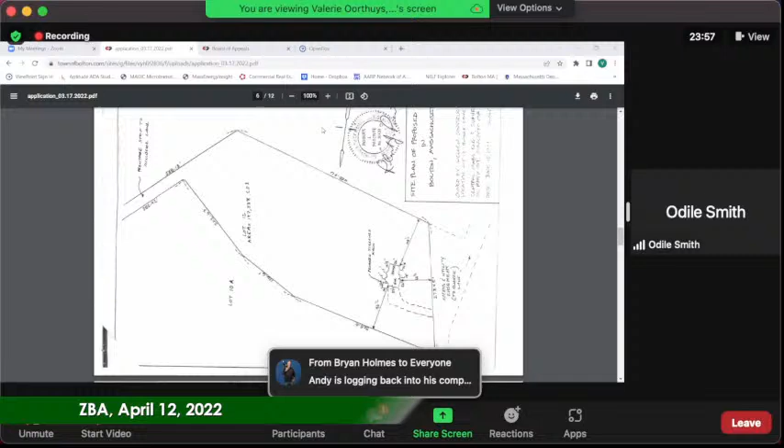The lot shape is really unconventional, if you look at it. The house is located at the lower end of the property, and that makes it geometrically impossible to fit a garage without impinging on the 50-foot setback line, near the existing driveway and close to the house. This is as close to the house as it can be, and the orientation we chose so it fits at the end of the driveway is the one that impedes the least on the 50-foot setback.

If the house had been built in a different location and the lot was shaped differently, yes, of course it could have been somewhere else, since the lot is large enough. But we purchased the house last year, and obviously we haven't designed it ourselves. It was already like this, and as I mentioned, there was actually a shed that had been permitted at that specific location, but the shed is too small.

We cannot park a car in the shed. Actually, we had the shed removed, and our need for the garage is really to be able to park a car. The house has a garage, as you may see in the photo, but it's very small, and my husband's car actually does not fit in the garage. So there is a problem there. That's why we're seeking this, and we haven't found any alternative that would not require this variance.

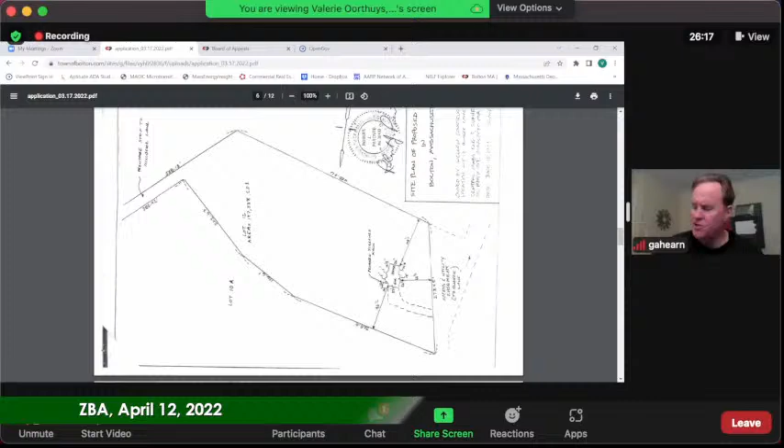Do I have a rendition of that drawing? Yeah, we have a drawing of the front, which just shows basically the door for the car going into a rectangle garage. So that's all we have.

Does it show there it's a one-story, or does it show the dimensions of what it'll be? Yeah, the dimensions are on the drawing itself. It is a one story. There is nothing above the car besides the roof of the garage.

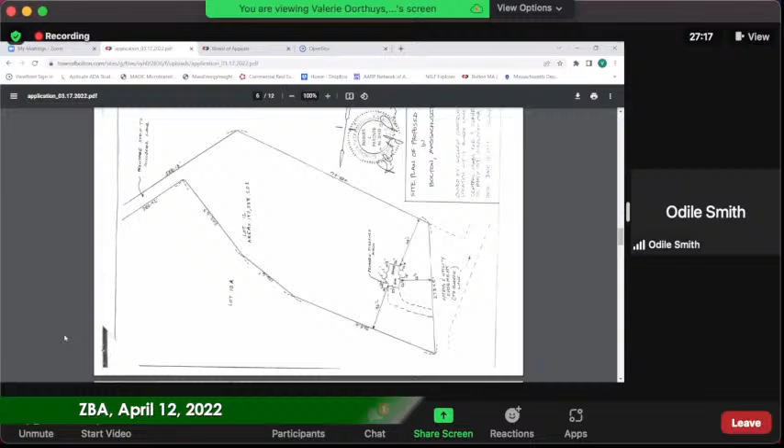I should remember the dimensions of the garage exactly, but of course I do not. I was really unsure what the conversation was going to be tonight, so I'm sorry, I'm probably not as prepared as I should be, but that's what I can share. Actually, if my phone doesn't lose signal, I'm going to walk upstairs and pull my drawing with the dimensions, so I can read them to you. They're marked on the map.

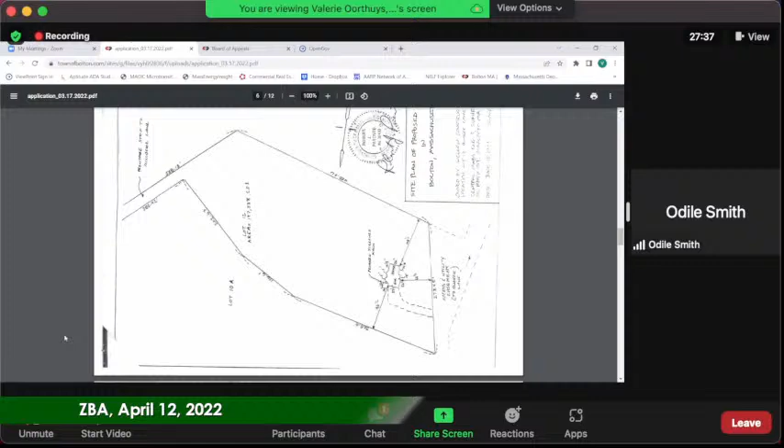Did you send us a picture of what the garage would look like? I don't have a picture because it's not something we're going to buy prefabricated, it's going to be fabricated by the contractor. Let me see here, give me a second. I'm flipping through to see if the contractor has a rendition of what they will be building. I have just this, I'm going to take a photo right now. And if there is an email or someplace where I can pass it on to you, I'm glad to do that.

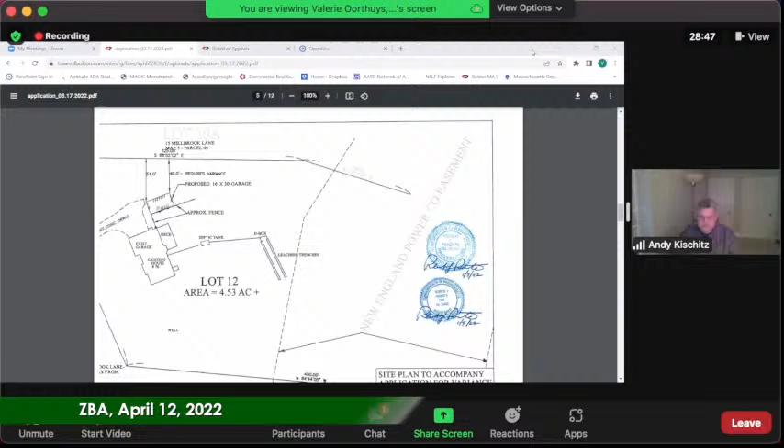But it's not very, I'm not sure it's going to be very telling. Okay, so you can- sorry, I was just going to say, you can feel free to send it over to me and I can share it. The email address is the one I've been using to correspond, townplanner@townofbolton.com.

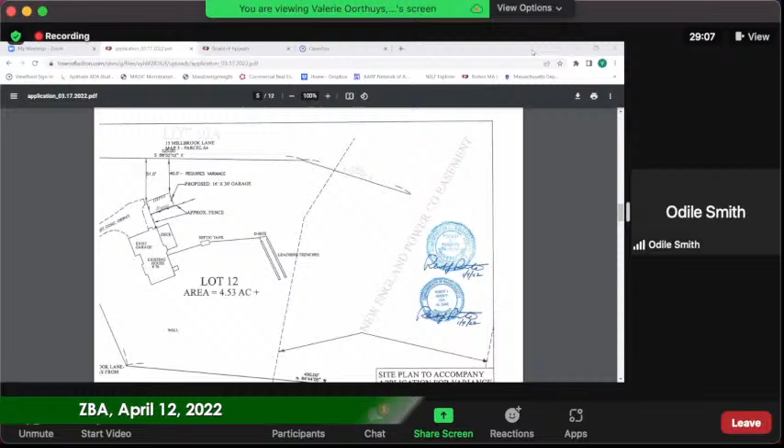I'm sending this to you right now, Valerie. Okay, thank you. Again, it's not very detailed, but that's what I have to share. It shows mostly the material of construction. I just emailed it to you. Yes, I'm seeing it now. My computer is very low tech, so it shows JPEGs as videos, so I apologize if this comes out a little strange.

Let me see. The dimensions of the garage, the external measurements, are 16 by 30.

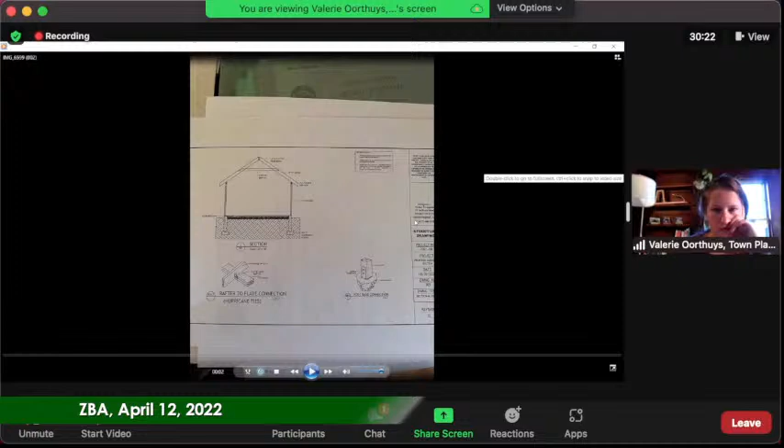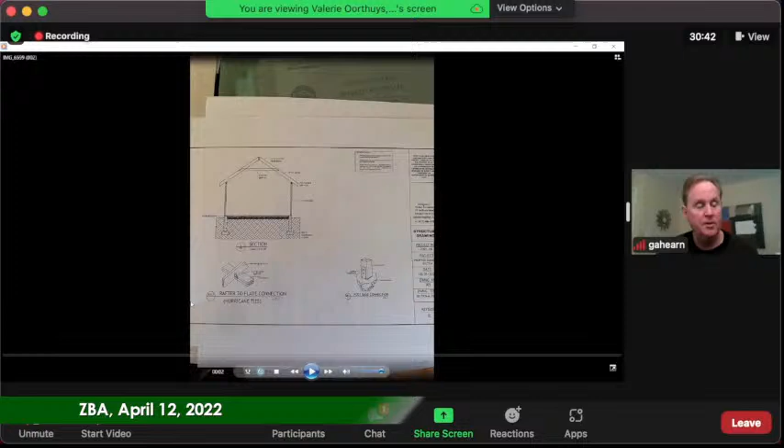And the property line that you're encroaching upon, have you talked to your abutter? Has your abutter had any communication about whether they're favorable to the structure? Yeah, so we've spoken to the family that lives there. If you can picture this, we have a pretty long shared driveway with five other houses. The one house that sees our house is the one that is in front of us across the driveway, so yes, they're fully aware and they have no issue with this. They're number 74, we're number 76.

The other side of the house, we actually do not even know them. They're not very close to us. They don't access through Quaker Lane, they access through, I think it's Millbrook. So it's really pretty remote from each other, and we're not in the same traffic zone either, because of the way the property line is and the accesses are to those houses.

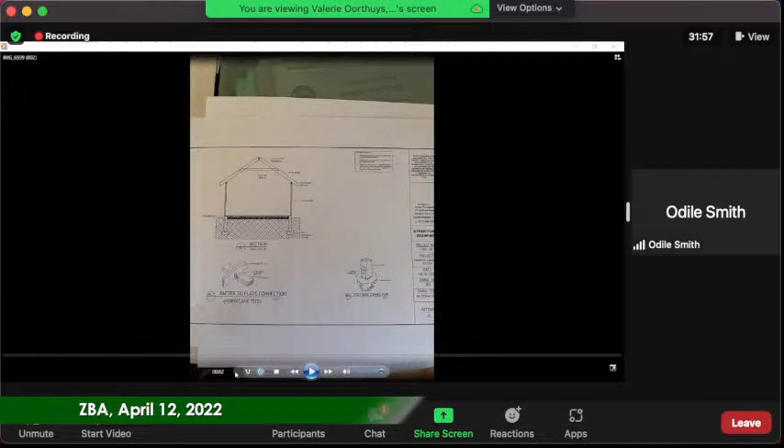On one of the pictures submitted with the application, where the garage would be, you could see a house through the trees. So I didn't know if that abutter had any concern with it. Those people, I cannot tell you, I don't know their names. We don't know them. For them, it would be seeing pretty much where the shed was, but we haven't walked around into their street and asked them anything at this point.

Valerie, have you received any correspondence from any abutters questioning the fact that it would be closer to the lot line than the normal standard? No, I haven't heard anything back, but I did send out the public hearing notices.

I think it's interesting. I know one of the plans submitted kind of shows how odd the lot shape is, but if I could just share a more full map to give you a better picture of this lot and what's going on here.

So the lot is technically a backland lot, but it's quite strange. All of the homes, the reason why the applicant's home is along what appeared as the far end of the lot, is because it's actually closer to the neighbors and the shared driveway that goes off.

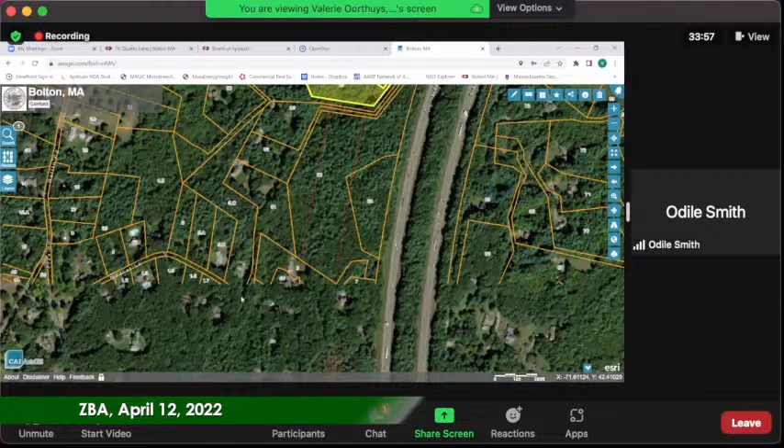Does the driveway go off of Millbrook? No, the driveway goes back Quaker Lane. Okay, so it's coming up from the south. So it's definitely a unique situation.

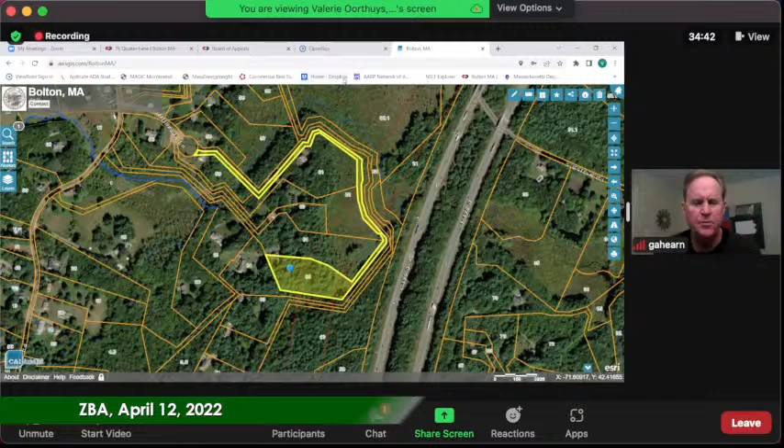Does anyone else from the board have a question about what's been presented, or do you need any additional information? A question I had, George, is you asked it, but I want to clarify. So in the pictures, you can see a house, but that is not the house in question of the setback, right? It's a different property that's within the 50 feet. Is that correct?

Well, I'm not sure which picture that was. I guess my point is you had mentioned that the neighbor within the 50-yard buffer didn't have an issue with it, but the neighbor in the picture, you said you didn't know them. I guess it's kind of a moot point if they're not within the 50-yard buffer.

So when the abutter list was created, there were I don't know exactly, 18 I believe, of them. So I'm not sure who is who in that list exactly.

The people that see the house definitively clearly are those with whom we share that long driveway, and we are at the end of the driveway, that family and us, and they're right across from us. So those ones definitively see the garage. We know them very well. They're completely okay with this. If you need a letter from them, I'm sure they are more than willing to provide whatever is needed.

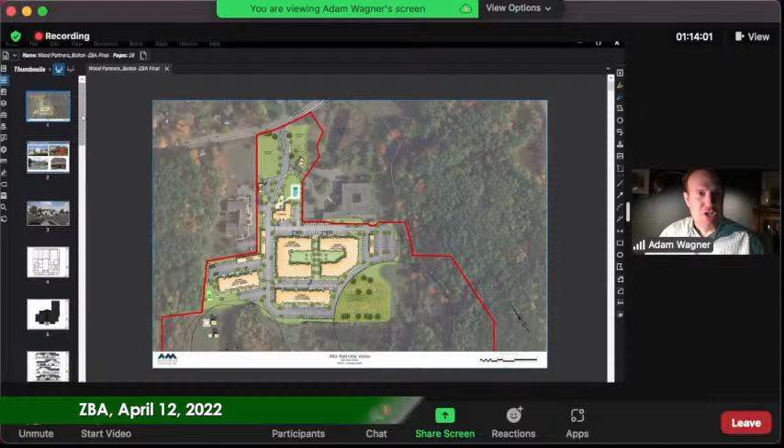Just a really quick, broad brush overview. I don't know how many of these projects you've seen, but we've got four total multifamily buildings, buildings 1, 2, 3, and 4. We've got some garage buildings, a clubhouse, and a mail and parcel room. We took the comments from you folks and from the Architectural Review Board, and we've made some modifications to the plans. I'm just going to touch upon the high points here today, and I'll be jumping around the presentation a little bit, I hope that's okay, but it's the best way to describe the modifications we've made.

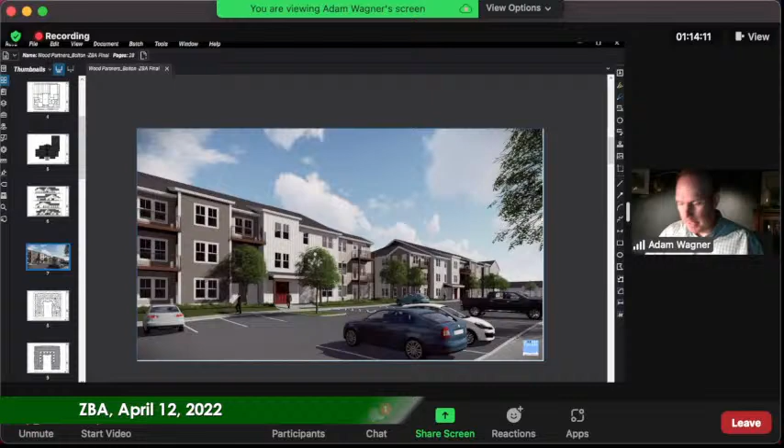The first one I wanted to point out on this rendering: we had presented a board and batten system on a portion of the buildings, and it wasn't all that apparent. So we've gone back in and highlighted that in the rendering, so it's a bit more clear for everyone to see. I think this slide is pretty indicative of that, and you'll see this throughout the presentation on other slides. I'm then going to jump back to the clubhouse building here.

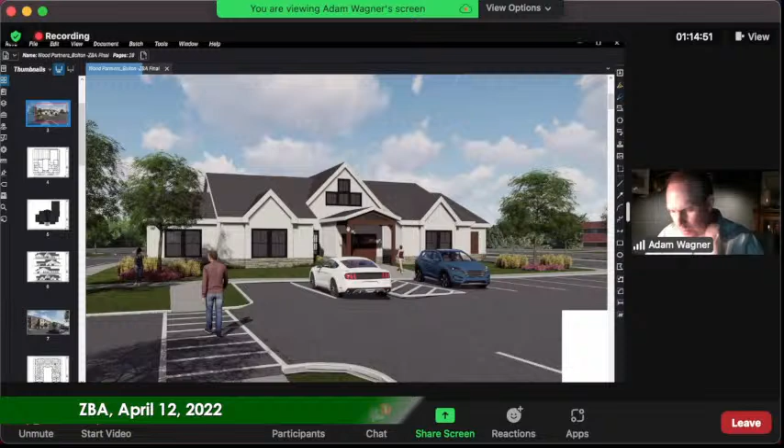So there were 2 main changes to the clubhouse building based on your comments. The first was the window setup here in the gable. And the second, if you'll recall, we had a panel over the main entry here, and we've opened that up as more of a post and beam type structure, more indicative of some of the architecture we see there in Bolton.

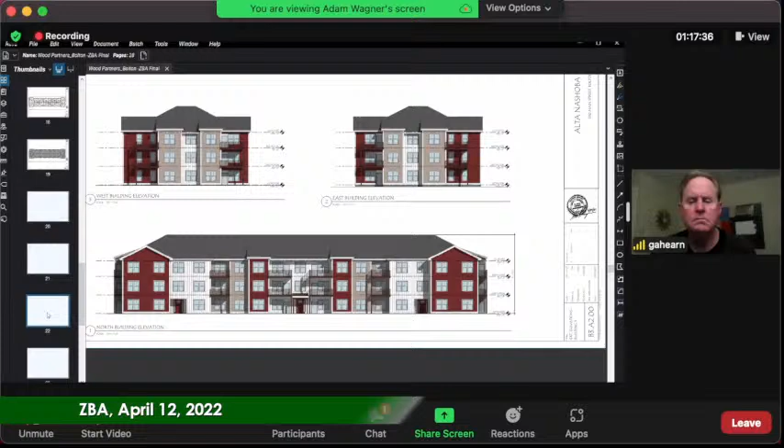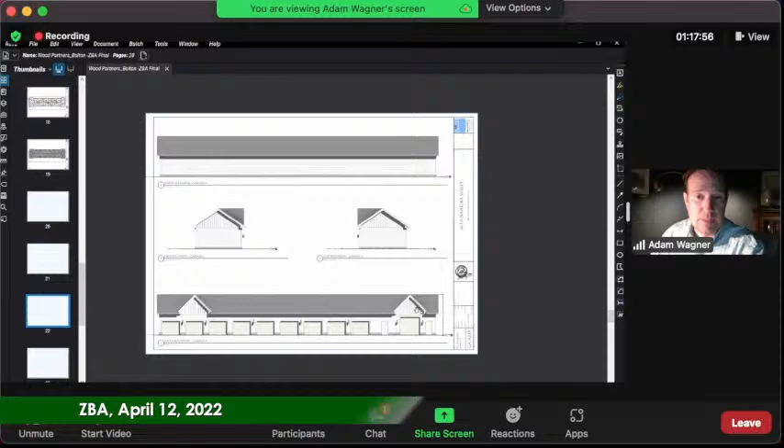I will then jump to slide 22. Here you've got the garage buildings. We have modified these roof pitches to more closely resemble the roof structures that we have on the clubhouse buildings. And if we back up one slide, we've added a bike storage bay to the garage, because that was a comment we received about additional bike storage. So one whole bay has been designated for that.

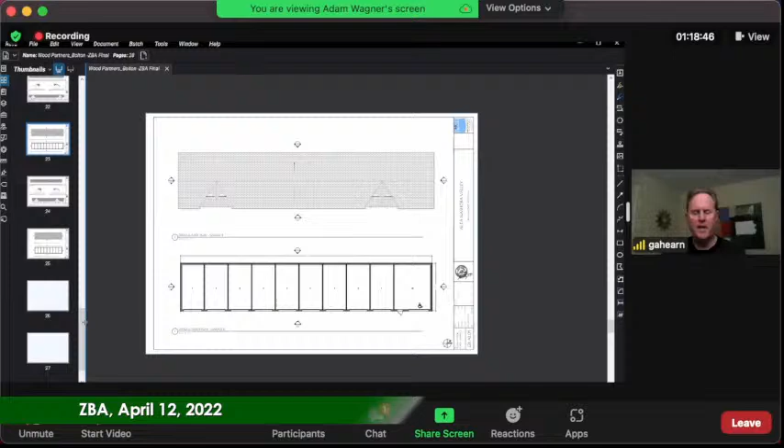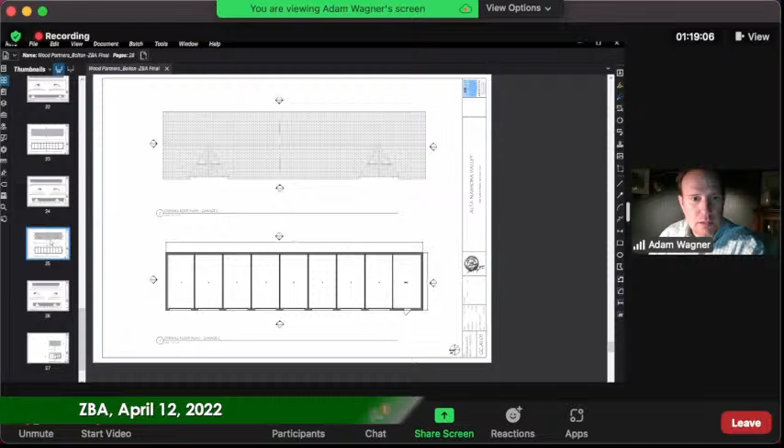And then lastly, on the garage, we have added an additional handicap bay on the end of garage B here, so we've got a little bit more balance in terms of the number of handicap garage spaces, which was one of the requests. This is garage B, we have one. This is garage C, we do not have one. And there's garage A, so one in A, one in B.

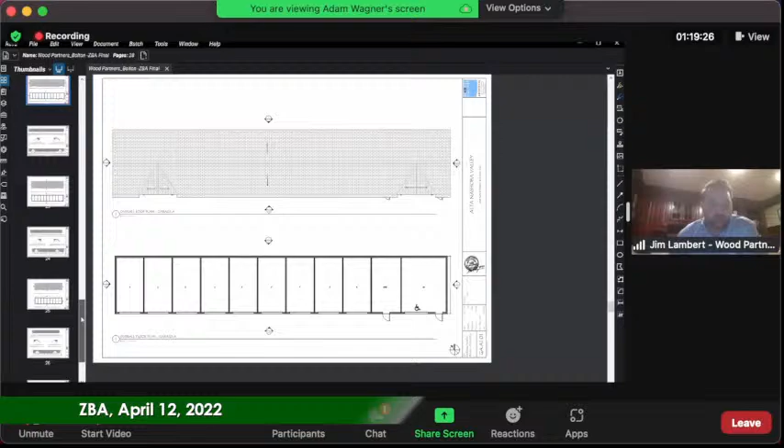Mr. Chairman, I think we had one originally, and there was a comment or request that if we could add a second. Yeah, that's right, we've done that. That was my comment, I think. That's right, yep, that's good.

And Adam, if we could just pause real quick. So before we move on from the garage, just a note on the bicycle parking, so everybody knows: we'll have racks, wall racks within that bay. I don't know the exact number, but it's not that you'll just walk in and put your bike wherever. There'll be racks that you can put the bikes on that we use in several of our properties.

Just keep, and those are locking, so how does that work? Yeah, so it would typically be like the mail building would be, you'd have a fob that would gain access to that bay. But would they be individually locked? It could be, they certainly could be, Mr. Chairman, that would be up to the bike owner. They're individually set up so that you could put a bike lock on them, certainly. Okay, and that's what most people do. Right, okay. Sorry, Adam. No, no worries.

So the last building I'll touch upon here is the mail and parcel building. We've modified the roof to more closely resemble what we're doing on the clubhouse. We've also added a small canopy here, and we've modified the relationship between these windows and the stone base, so it's a little bit more consistent with the other buildings and what we're doing. These are minor nuances, if you will, but they're all things based on conversations we've had with the Architectural Review Board that we believe just tightens up the overall design, makes it more consistent, and makes it a little bit more fitting with Bolton.

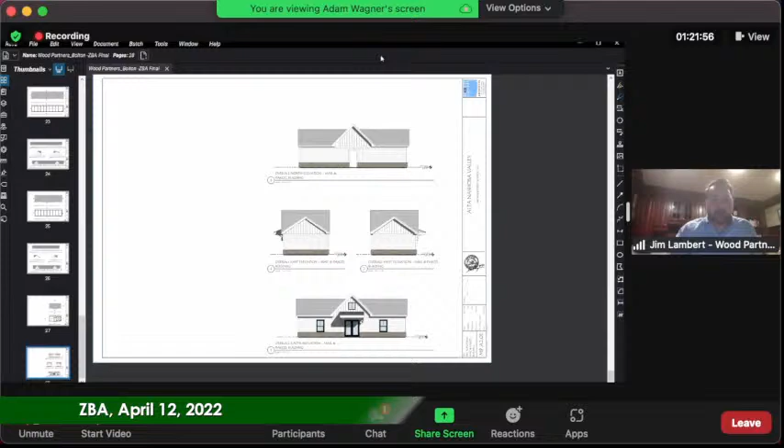Mr. Chairman, I'll just add that we will summarize in writing what those changes were, so it's not just up to the viewer to see the difference. We'll summarize that. That'd be helpful. That's great.

Yeah, but they did pop out, some of them, clearly, just looking at them and recalling what they were before compared to now. So it's nice that you incorporated as much as you did. We think they were great comments and certainly improvements to the project, so we're very pleased. I was going to echo that, Jim. We appreciate the feedback. We spend days, weeks, months staring at these plans, and sometimes it's those small details, the nuance, that brings a project into a community. So we thank you for that feedback.

Thanks, Adam. Bart, are you up next to show your plans? Hello, I am here, but I will need a minute to find my current plan. You want to move to the next thing, and then I'll be ready as soon as we get back. I was going to go to civil next, so I think we'll bear with you if you don't mind and go with you next. All right, the civil discussion is going to be a little bit more in depth. I forgot I was on my home computer today, so. No rush.

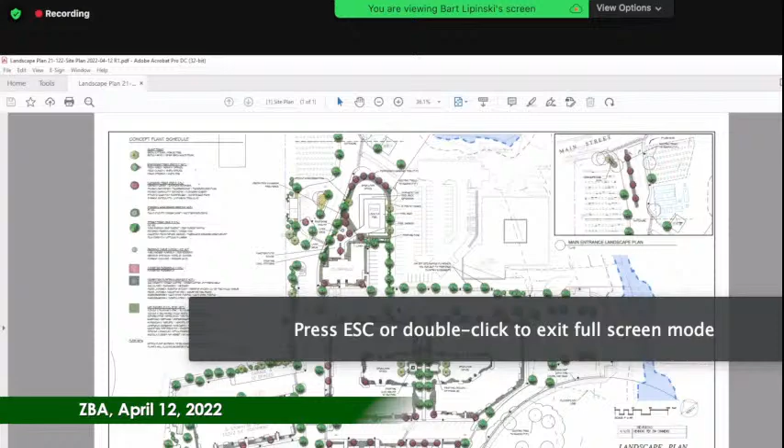There we go. All right, yeah, I was breaking up a little bit there. I might have to call in the dogs. Yeah, okay, I'm back, I think I'm back. I keep getting kicked off for a second here, so I'm not sure where I left off. I don't know if anybody heard anything yet, Bart. Okay, so perfect, then I'll start over.

So what I was mentioning is we did incorporate the minor site revisions into our plan. That gave us the opportunity to work with the lighting that we didn't have before, but we have it now. So we were able to incorporate street trees around the buildings with street lights. We moved some trees in a few locations, but we also added a lot more upright type flowering trees and upright type shade trees in the tighter areas around the building.

As we come into the site past the clubhouse, you can see the flowering trees that'll pretty much wrap 3/4 of buildings 1 and 2 between the parking and the buildings. We did add some trees along the top part of our site. We did have some notes about easements because some of these trees would not be on our property, but we would be working with that as we get into the final design process.

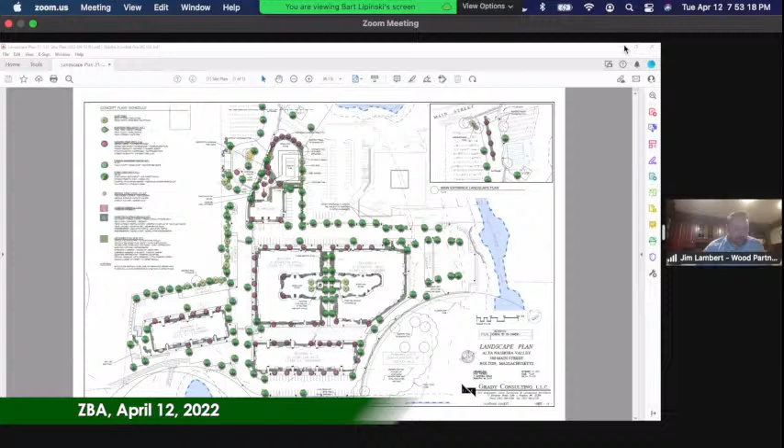All right, I think I got it right that third time, so I'm happy. You did, Bart, thank you. Persistence pays off, Bart - that's what my wife tells me. Yeah, well, she's a good wife. At least she tells you what you should be doing.

Thanks, Bart. So next up, Mr. Chairman, I'm going to turn it over. Phil, I see you there, are you prepared to jump in? Phil Cordeiro from Allen and Major is going to jump in and walk through some site-related changes that came out of previous discussions in the peer review, and then I think he's got some other comments on peer review response as well. So Phil, you can take it away.

Oh, you're on mute, can't hear you, Phil. I don't see your mute button, but we can't hear you. Pivot, there you go, hear me now? I apologize, there you go. Is that better? Are you able to hear me now, Mr. Chairman, members of the board? Yes, loud and clear. Good, I apologize for that delay - apparently we consultants are having technical issues tonight.

So let me see if I can just share this. Good to see it happens to the best. I'm only going to do it once, though - you get the Bart show 3 times, I'll try to do this one time only, though. But for the benefit of the commission, just to confirm, everybody is able to see the screen share - it's just our color site plan that you've seen previously. I'm going to walk through some changes on it.

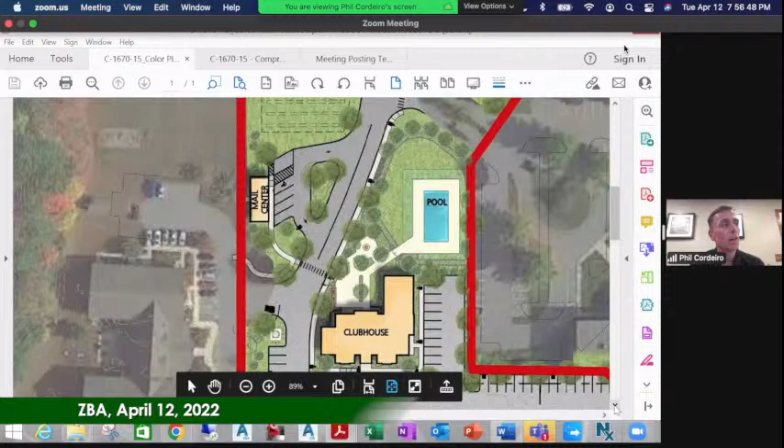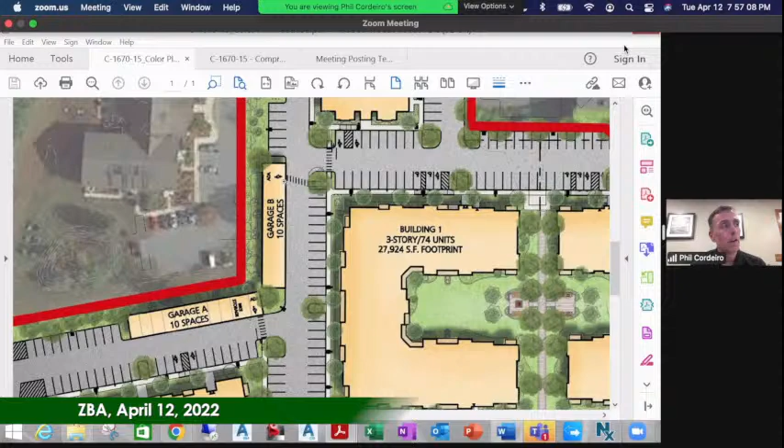So things that we've incorporated into the plans: we have included a sidewalk that's going to take us over to Bolton Country Manor, which will allow connectivity from that development up to Main Street, which was the request of the town planner and some coordination with the board. Jim alluded to it earlier in the presentation. Within the garages, specifically Garage A, we have added bike storage elements. We have also added within Garage B an additional ADA accessible garage space, which was requested by members of the board. And panning over to Garage C, we now have another internal bike storage area. So everything has been distributed across the site to provide that bike and pedestrian connectivity.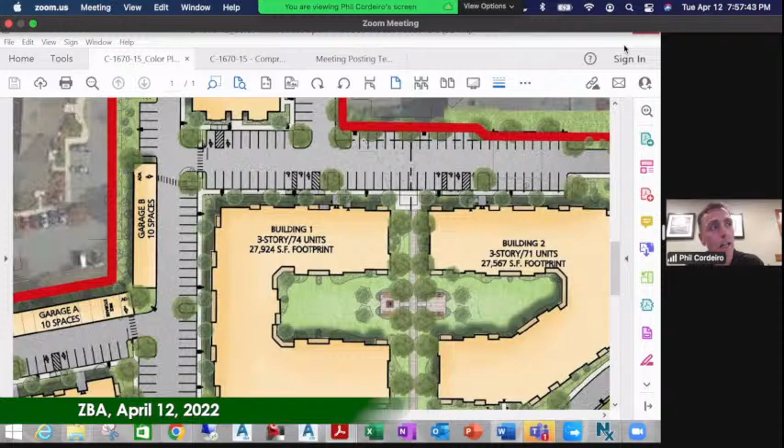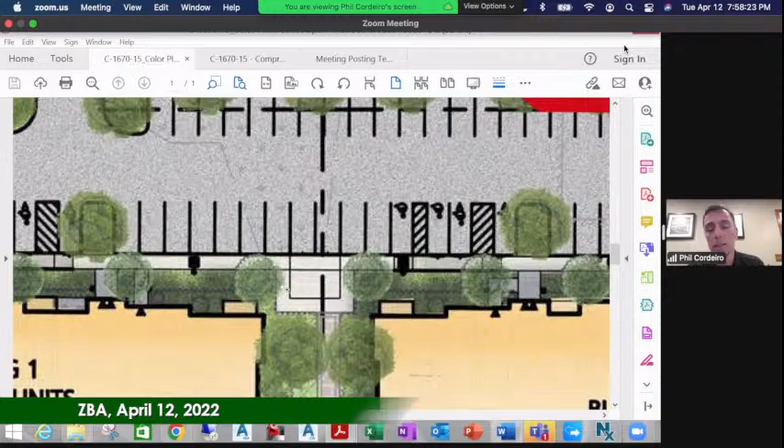We have been working with the applicant on appropriate operational changes to accommodate move-in vehicles for the site. One of the things that will be expressed on the site plans coming to the board is that in the vicinity of buildings 1 and 2, we have created a modifiable area that's generally parking, but when it needs to be accommodated and available for move-in vehicles, we will have a series of removable bollards that will allow a move-in vehicle to back into these spaces, into the park zone between buildings 1 and 2, and accommodate furniture movement. This will be scheduled through the operational aspect of the site. The on-site property managers will be responsible for coordinating those spaces and having all the residents coordinate through them when they're anticipating large deliveries.

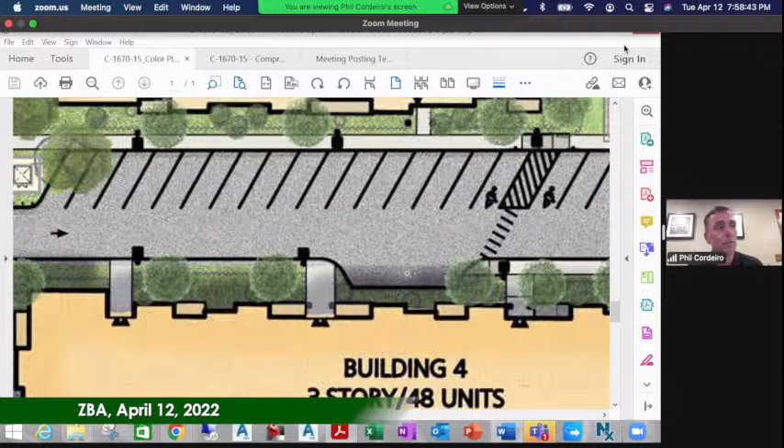Similarly, adjacent to building 4, we have created an accommodatable pull-off spot directly in the backside of the building for a similar purpose - deliveries, move-ins, and the like, large vehicles that need to be pulled off the roadway for move-in. And likewise, adjacent to building 3, we have our dumpster and recycling center on the westerly sideline of building 3. We've also striped off areas of pavement not allocated to parking that will be used again for those move-in vehicles and large service vehicles that need to access these buildings and provide delivery to the resident.

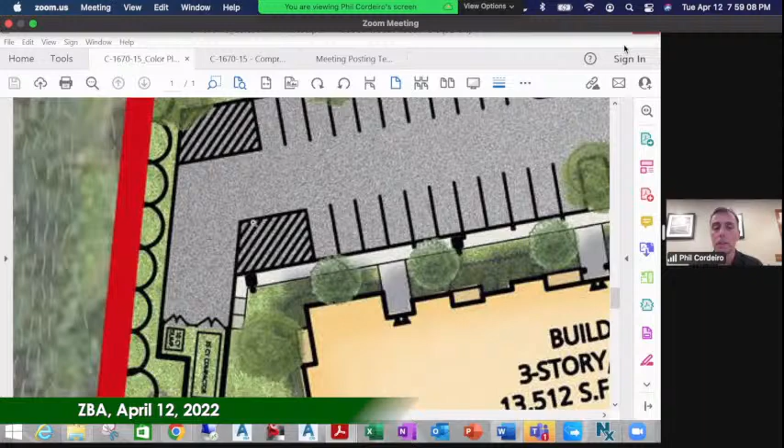As part of our expansion of the site amenity package, we've allocated an area to the south of building 4, outside of our wellhead protection zones, which are denoted by the darkened circles on the plan. We've provided an accommodatable area for a playground. The final design is to be worked out, but we certainly have a large enough area that we can provide a sizable playground and playground equipment for the children that may inhabit the property.

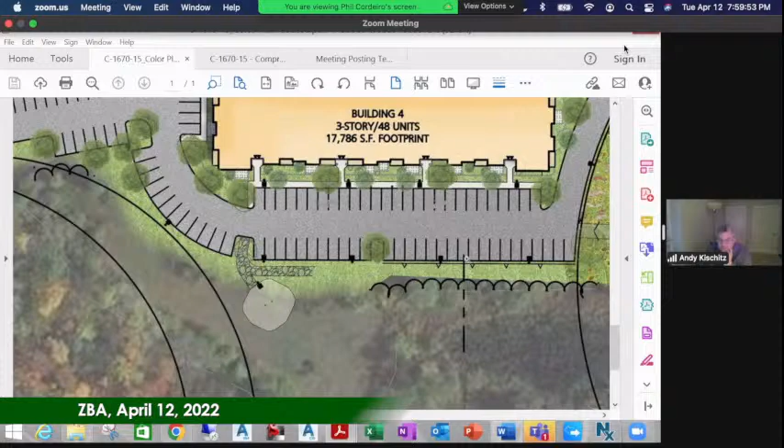We have also accommodated on the site plans some additional paths, not only for accessibility to snow storage areas for general operations of the site, but we've also added some operational paths now to really hone in and refine what the site needs to operate. In this particular case, this will be a drivable path that will take you to the drinking water supply wellhead, so that it can be properly maintained.

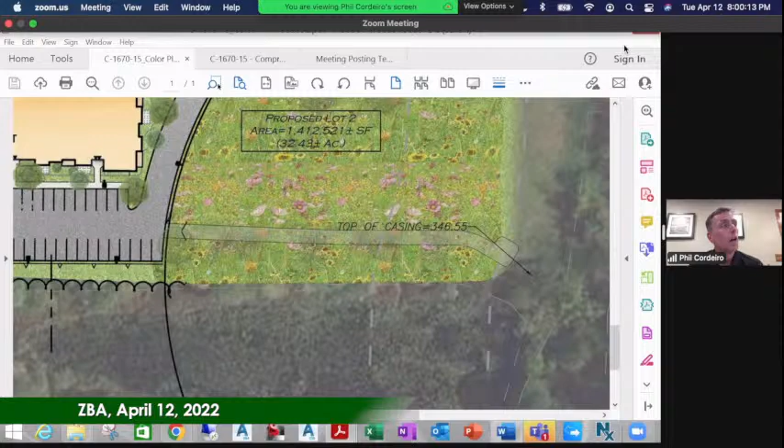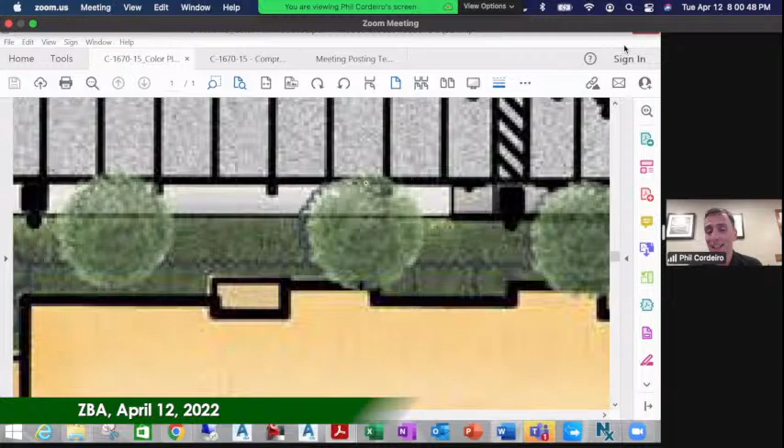Lastly, through correspondence, we have also provided in front of each building - they may be very difficult to see on these plans at this scale, but they'll be much more recognizable on the plans as submitted - two shareable PEDs, or electric vehicle charging stations. One is here under the cursor, the other is slightly obscured by the landscaping. Those two PEDs will provide serviceability for a total of 4 vehicles at each building. We're also installing future accommodatable PEDs, so the infrastructure will be in place that if we need additional EV spaces, we will have 4 accommodatable spaces at each building to be able to provide.

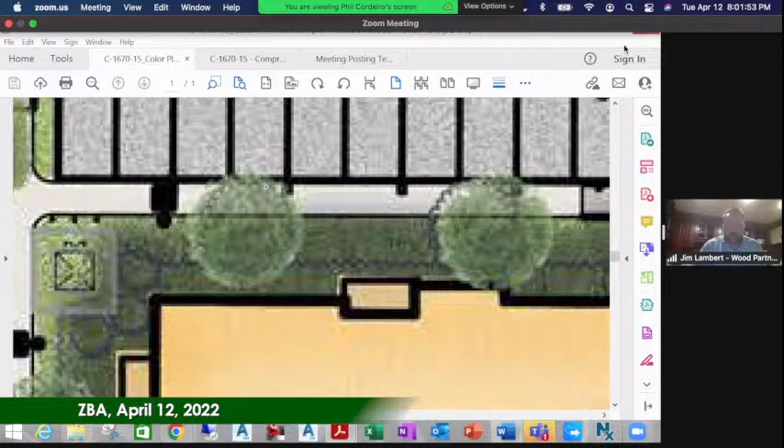That's good growth planning for as electric vehicles probably become more popular. Yeah, that's certainly the future, and we want these properties to be adaptable to that as the fleets grow. It's better to build it out now than to come back and disturb a property that's already there later. The harder part is putting the infrastructure in below parking and sidewalks; the easy part is putting in the actual systems later on. So the planning now is important.

I'm guessing Phil logged off and is logging back on. Rough night for technology. Well, it beats a lot of the world, right?

I'm curious about these parking spots for the electric cars. Is that the only location you intend to put those, or will you place them around all the buildings, a couple at each? They're spread out - when Phil gets back on he can show where those go. We're planning 4 spaces per building at occupancy, plus an additional 4 pre-wired for future installation. So that would be 16 in total at occupancy and 16 more. Yeah, correct.

Let's see where... apologize for the disruption here. See if I can.

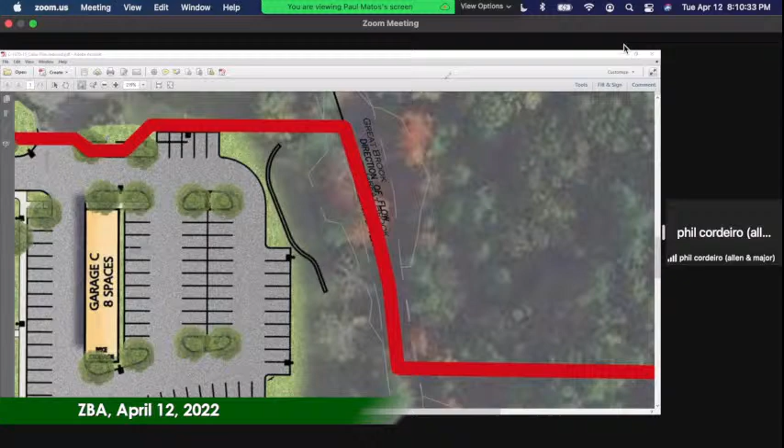And Paul, if you could pan to the southerly fire pond for me. How high is that? What is that going to look like? It's a segmental block retaining wall. It'll be about 5 feet in total height. The actual color and material type has not yet been selected, but it'll be something appropriate. It will largely not be visible from the site since the site will be above that grade, so it would only be visible from the water side or from the wetland side.

This is the other area that I was referring to. That area where the cursor is moving is the outer edge of the fire pond storage area, and that's currently used as part of the stormwater management system. With Amy Ball on site, we showed her how that was currently being utilized. The current owner of the land, Bolton Office Park, Condyne, has recently reconstructed some riprap spillways in this area at the request of the Conservation Commission. With all of those factors in play, they did not feel that what we were proposing was adverse to that area. We will, of course, defer to them, providing that in writing back to the board. But that was the general sense of discussion we had with them out there on the property.

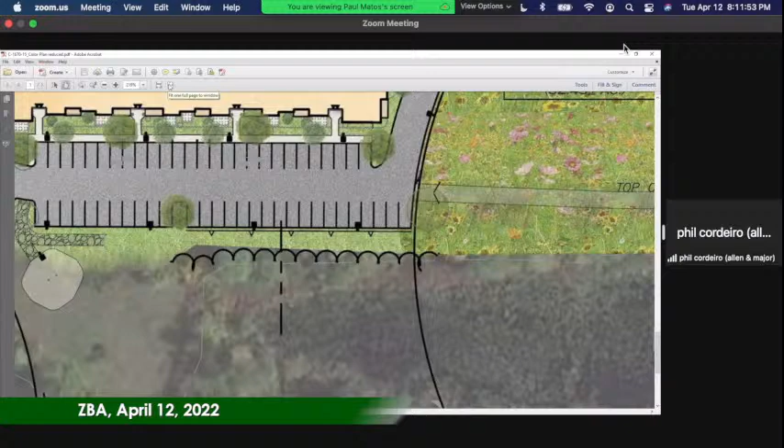On that playground area to the left of where you were just speaking about, is that going to have some type of defined border? Is it just free space, or is there a fence around it? It's not fully programmed right now.

The way it's anticipated, it would not be fenced, it would be open, but it would have a border around it. Typically you'd provide timber edging or plastic edging, and then a mulch or soft surface underneath the play area. That would be wholly contained within the gray shaded area, but we still need to program that area and figure out the exact elements.

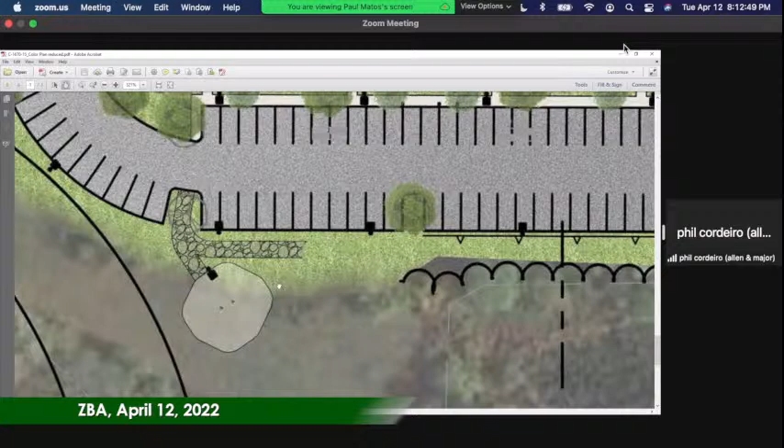So thank you, happy to answer anything else. I apologize, does that answer your questions, Andy? Yes, thank you, okay perfect.

Can you remind me what those boxes and circles are in the 100-foot well thing? Sure. As part of the public water supply, we need to create a reservoir of not only public drinking water but also fire supply water. Those are annotations for the pump house and also storage facilities for that water supply, for the sprinkler system for the buildings.

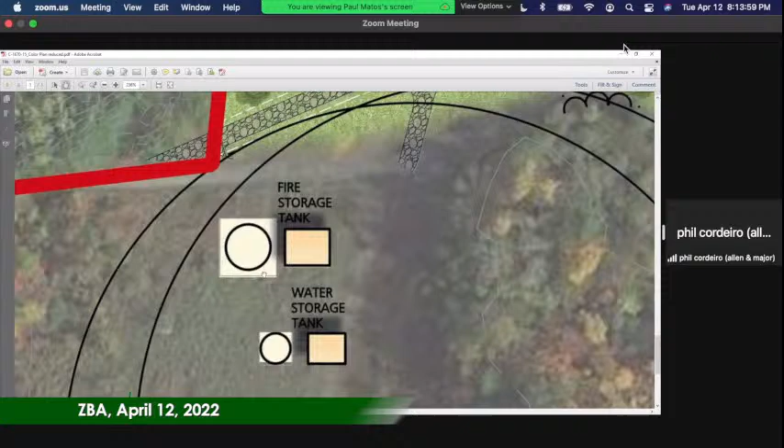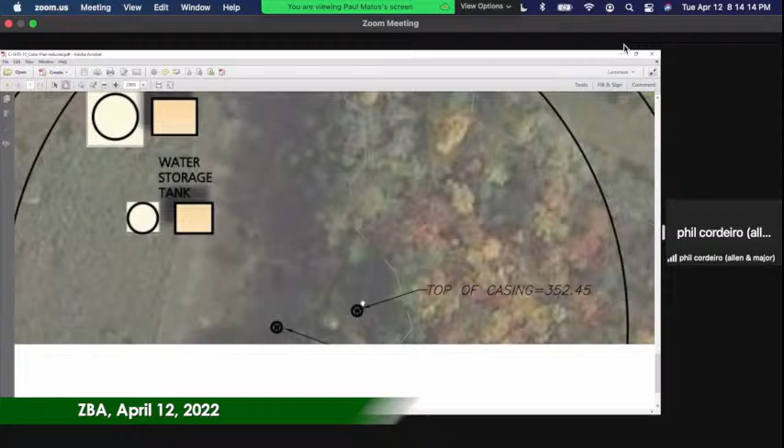Are there two wells there, and that's why we have two circumferences outlined? That is correct, there will be two wells in that general vicinity. Those darkened circles represent each of the wells, and there will be a third well to the east of there, which will provide additional drinking water. Again, the darkened circle to the east, right? Yes, right there where the cursor is moving will be our third well on site.

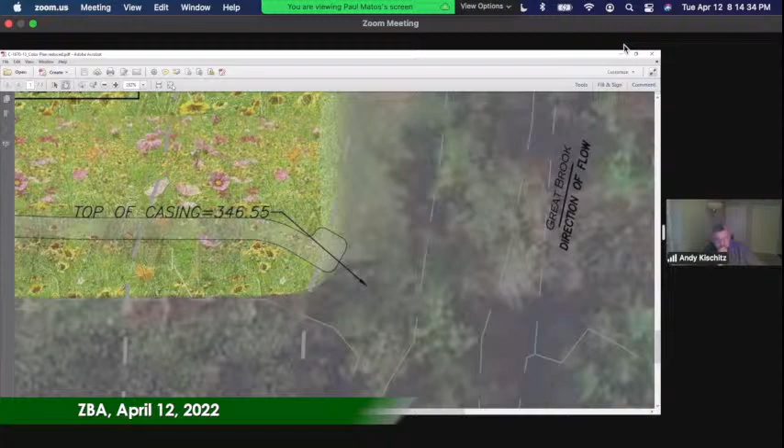By those little storage tanks we were just talking about, I see like a path rendering. What is that, or is that just general access? I know this whole area still needs to be hashed out from an access perspective, but I'm just trying to understand what that is.

Yes, the area does still need to be hashed out from an access perspective, and we're looking for feedback and input from the town as to what this finally looks like. On previous application drawings, we showed a connection from the end of the parking lot through a gravel access road to connect to the existing gravel access roads that wrap around behind Bolton Country Manor and on the westerly side of the Florence Sawyer School septic field, as an alternate route to get over to the lacrosse fields and community gardens. We've carried forth that gravel path for now, but it needs to be refined as we continue to work with the town.

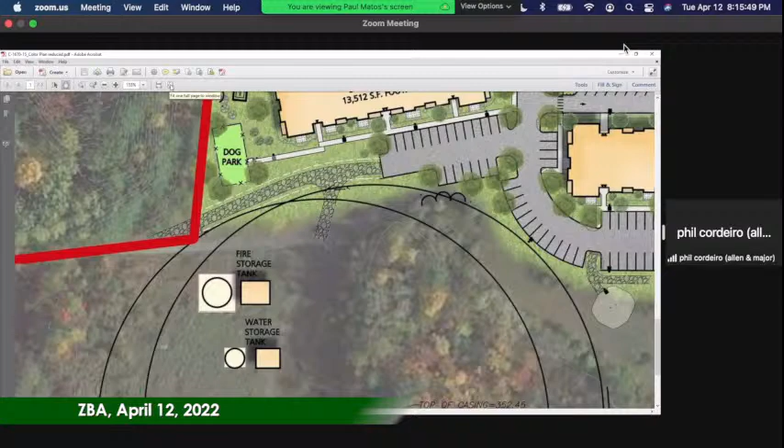For that fire storage tank, does that need any particular access for the fire department, or is it just water? Yes to both, it is water and it needs to be accessible to the fire department.

So the access path that currently exists taking people out to the lacrosse fields and community garden will stay. We will gate it off because we want to dissuade personal vehicles from going back there any longer, but it needs to remain accessible so maintenance vehicles and the fire department can go back there. We've also asserted that the access path can remain open for fire and emergency vehicles to utilize if there's an emergency on the lacrosse fields or at the community garden, so there is a response plan in play. We were just dissuading from general all-purpose use.

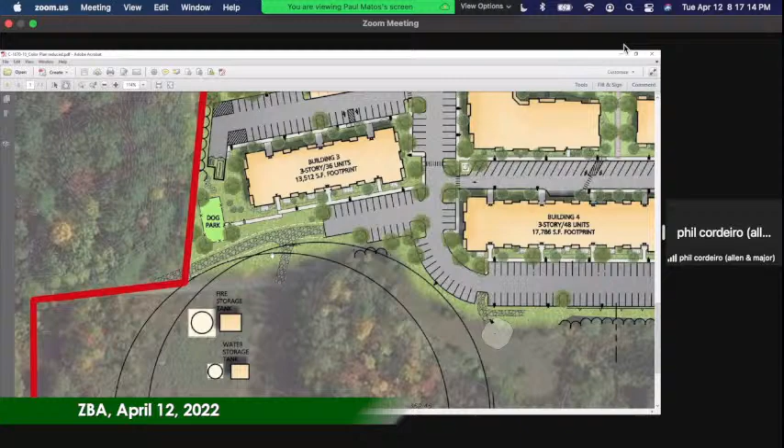So those are allowed uses within that zone area, to have emergency vehicles able to get within those radii? Yes, that will be acceptable to DEP based on our experience and our consultants' experience. Perfect, thanks, thank you.

Thank you, Phil, Mr. Chairman, that concludes our presentation, but happy to answer questions on civil, architectural, or landscape at the board's desire. So are there going to be more dogs than kids on the site? The dog park looks bigger than the playground. Generally, that is the case, yes. Really? We have so many dogs at our properties, you wouldn't believe it, the population of dogs has exploded over the last several years. I'm not sure if those are exactly to scale, but interesting, dogs are very prevalent. Where do the cats play? Inside, hopefully. Just out of curiosity, for the dogs on site, do you have any restrictions, like size restrictions or breed restrictions, or are you completely pet friendly? Yeah, that's a good question, I don't have the answer on which we do not allow at the moment, but there are breed restrictions that our property management group would implement when you're leasing. Those would be clear to a future resident when they're coming to look at the property and lease. So yes, but I don't know off the top of my head which breeds those are. Interesting.

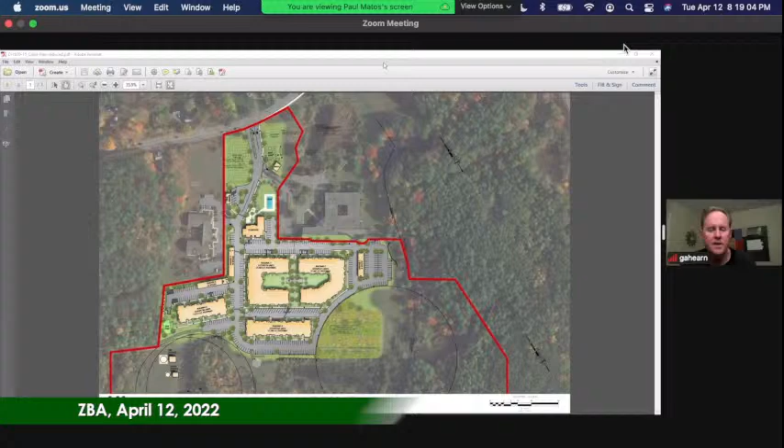Well, there's been some good progress, certainly encouraging, taking to heart the various comments offered from the board, our consultants, or the town. It's nice to see it working into the plans; it will make it more receptive as we get closer. As we said, we'll probably need an extension letter to get us into July.

Yes, Mr. Chairman, we think the feedback all the way around has been fantastic. The process has been great from our perspective, and we appreciate all the comments and always try to do our best to incorporate the ones that we can. I think we were able to do a lot here, and we're proud of that. We're thankful for all the feedback so far.

So given the timeframe, when do you think you'll have new materials, say some submitted tomorrow to Horsley Witten and whatnot? We're at April 12th right now. Usually Horsley Witten needs a little time frame to turn things around, so are we looking at early May for our next hearing? Does that work into your calendar, for you and your team? Did you have any idea when you thought?